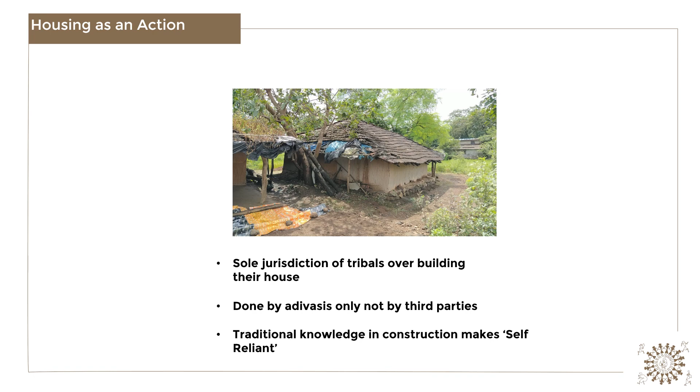Talking about their construction methodology and building materials, Warli makes vernacular houses like wattle and daub construction using karvi, which is a natural grass, bamboo, cow dung, mud, timber, along with Mangalore clay tiles, which are used as a roofing material, and other natural fibers.

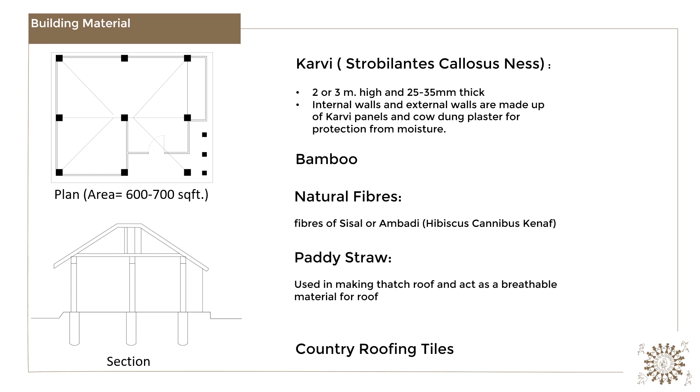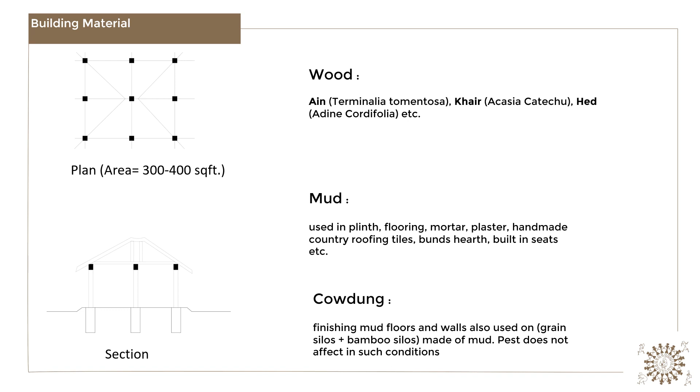They use locally available timber wood, such as ain and khair. They use mud and cow dung in building their houses and for making canvases to draw Warli art over. These are the various typologies of Warli housing construction.

After documentation of the tribal community and doing an ethnographic study, the project brief comes down to the following points: their cultural heritage and values should be preserved, and people should learn from and espouse the cultural values of the tribal people. Hence it is needed to display the traditional heritage, cultural values and ethos of the Warli community. Since they are a socially and economically less privileged society, it also needs to generate employment avenues for the tribals and boost tourism in the region.

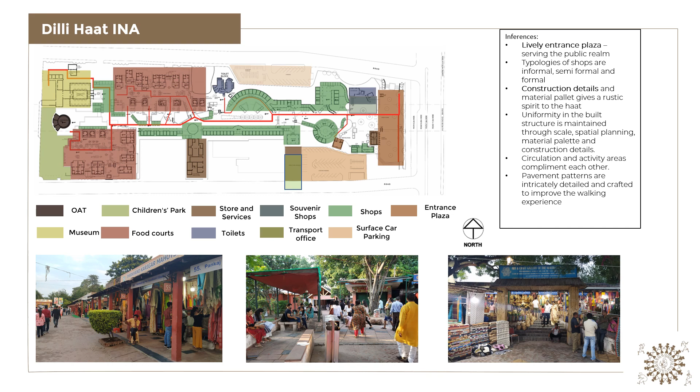I did case studies of Delhi Haat INA, Pitampura, Janakpuri, and the National Handicrafts Museum. Inferences from Delhi Haat INA are that it provides a lively entrance plaza which serves the public realm. There's uniformity in the built structure maintained through scale, spatial planning, material palette and construction details. Also, crafting of paving patterns is done to improve the walking experience of visitors.

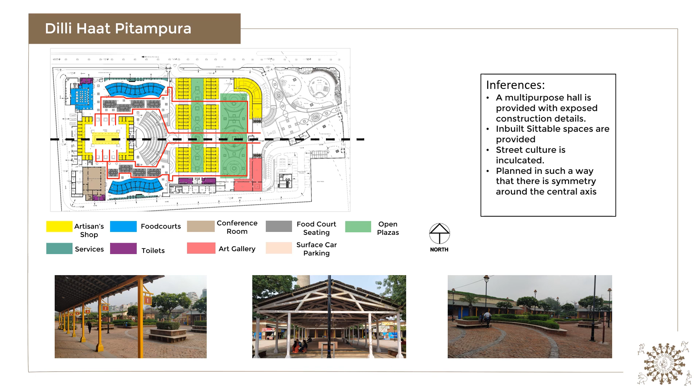Inferences from Delhi Haat Pitampura are providing an open multipurpose hall surrounded by shops, with inbuilt seating spaces in the plazas. Street culture is inculcated and planned so there is symmetry around the central axis of the haat. Inferences from the National Handicrafts Museum are that segregation of areas is done via a strong axis while yet creating visual and physical connection.

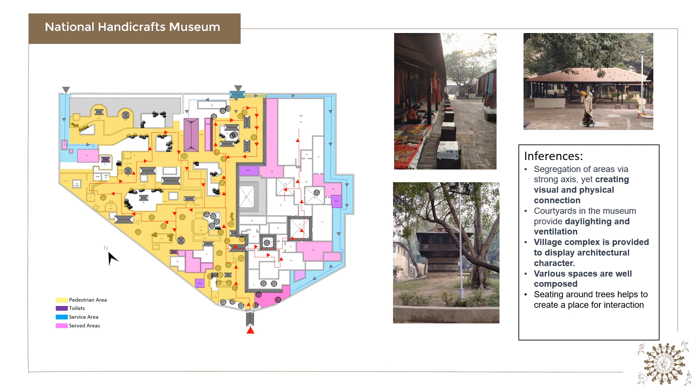In the National Handicrafts Museum, a village complex is provided to display vernacular architectural character. Inferences from Delhi Haat Janakpuri are that the built mass is kept fluidic in nature, and a very different architectural character is developed from the other two Delhi Haats through an eclectic mix of materials and juxtaposition. The third inference is that the cluster of cylindrical shop units looks good in plan but does not perform in reality, as it creates lots of negative spaces at the heart.

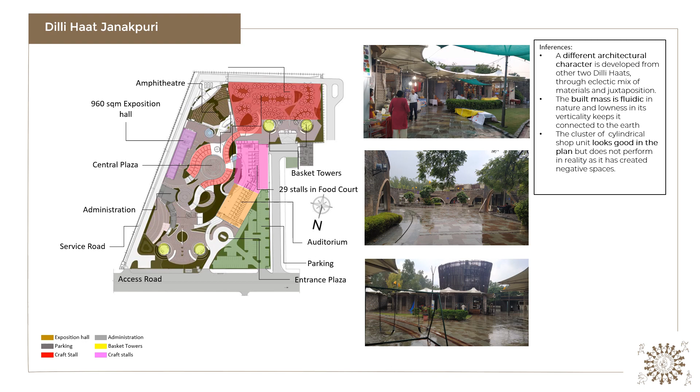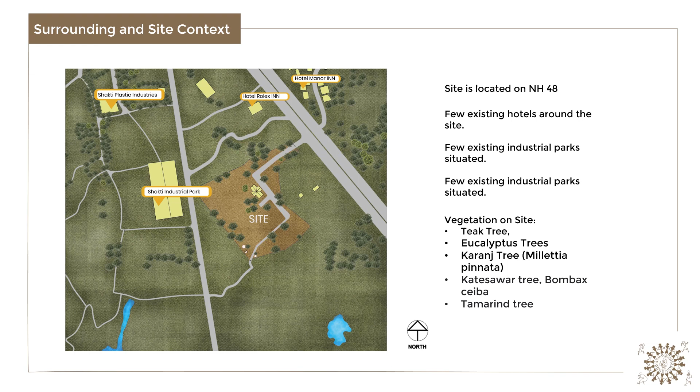Talking about the surrounding context, the site is located on NH48, and it is only through this highway that tourists will access the haat. Apart from vast farmlands around the site, some hotels and industries are also located, which are quite less consequential to the design of the haat. Natural vegetation and features on the site will be preserved, except the existing building, which needs to be demolished.

Talking about the topography of the site, it's an undulating site covered with shrubs, hedges, bushes and some rocky terrain. The site has a very gentle slope of around 3 to 4%. This feature of the site can be used in creating level differences, generating interesting urban design elements like steps and other kinds of inbuilt seating.

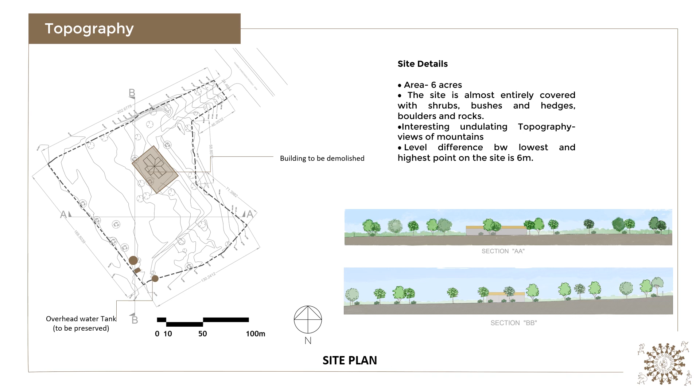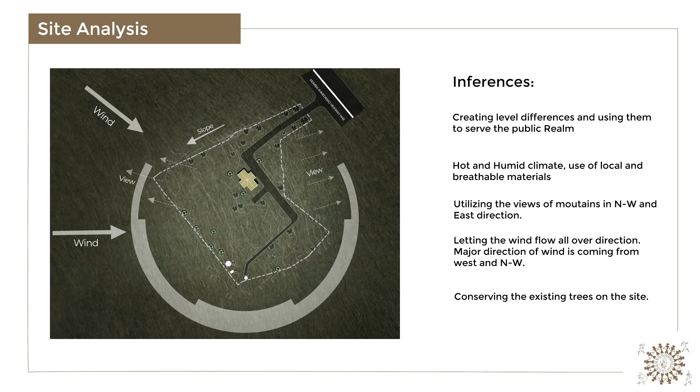Talking about the site analysis, the climate of Palghar is hot and humid, with maximum temperature reaching up to 40 degrees Celsius. So I need to employ local and breathable materials in the design, like using lime mortar in making brick walls and also using local timber. Also, the views of the mountains should be exploited while making the design, and the massing of the haat should be done so that winds coming from the west and northwest flow all over the site.

These two are the views to the mountain ranges from the site, and these views can be exploited while designing the haat to provide interesting open public spaces which can harness the beauty of these views. This slide shows views of the site depicting its natural topography, terrain, and vegetation.

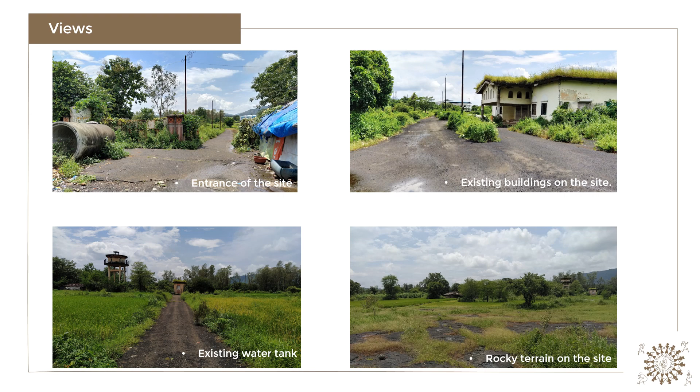For this project, I have taken inferences from the Development Control Regulation of MMRDA and the National Building Code. It comes under the land use classification of public and semi-public zone, with maximum ground coverage possible of 35%, maximum FAR of 1, setbacks from the boundary of 6 meters, and maximum building height possible in the site complex of 15 meters.

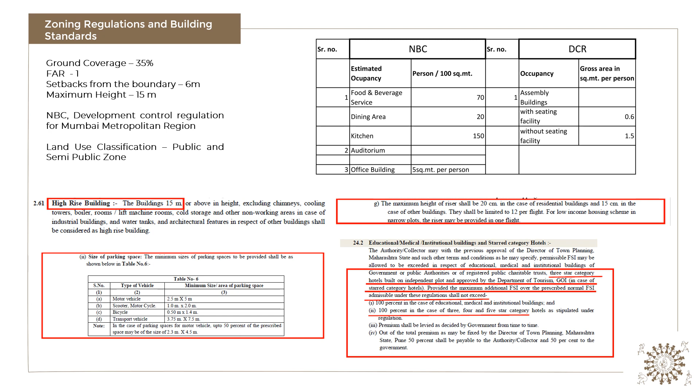After doing all types of studies and analysis, I think in a larger context the project should serve and incorporate the views, needs, and necessities of three stakeholders: government, tourists, and tribal people, in the priority order of first tribal people, second tourists, and third government.

For zoning purposes, I have divided the site into three major zones. First is the welcome zone, which will welcome the tourists. Second is the interaction zone, where tourists get a chance to interact with shopkeepers, vendors, and artists. Third is the dwell zone, where tourists get a chance to work with the artists, take part in workshops, and make something, so they are able to espouse the values and cultural heritage of the tribal people.

The welcome zone will facilitate the needs, necessities, and views of administration and government. Facilities like admin offices, entrance plaza, ticketing, staff residence, and residence for guests and VIPs will come in this zone, along with organization of cultural activities. In the interaction zone, it is designed to serve the public realm and promote interaction of tourists with tribals.

This zone would include spaces such as plazas, streets, art and craft shops, food courts, and multipurpose halls.

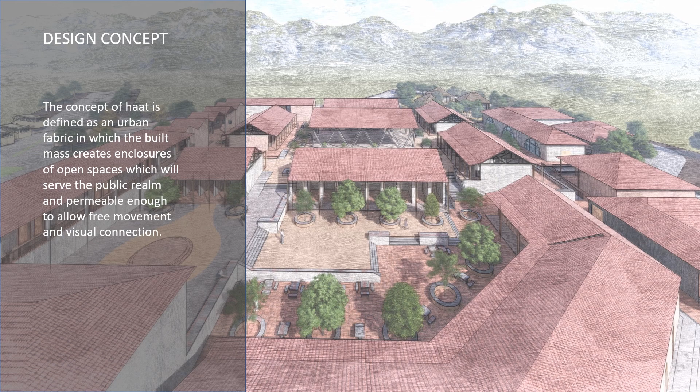Now let's talk about the design concept of the haat. The design concept of the haat is defined as an urban fabric in which the built mass creates enclosures of open spaces which will serve the public realm and be permeable enough to allow free movement and visual connection throughout the haat. In the design of the haat, I have majorly focused on the design of public spaces, and I have also done it as an advanced study topic.

Now, for public space design, I had to study placemaking. For this, I took reference from the Street Life project by William H. Whyte, who was a sociologist. He did the study over the public spaces of New York. He argued that placemaking is a sociological phenomena which supports all the economic and social activities in a public space. As an urban designer, one needs to design public spaces in such a way that it facilitates the social and economic activities of that area.

Also, I have taken references from my case studies, and the design elements which I have considered in my design are creating open public space through enclosure of built masses, creating level differences as per the contoured site to create various urban design elements like steps, articulation of plaza, inbuilt informal seating spaces, and landscape. Also, I will be giving a rustic effect to the haat by providing street corridors along shops and food courts, also using traditional built form in the haat, providing the views of natural scenery and mountains from OAT, stage, and guest house.

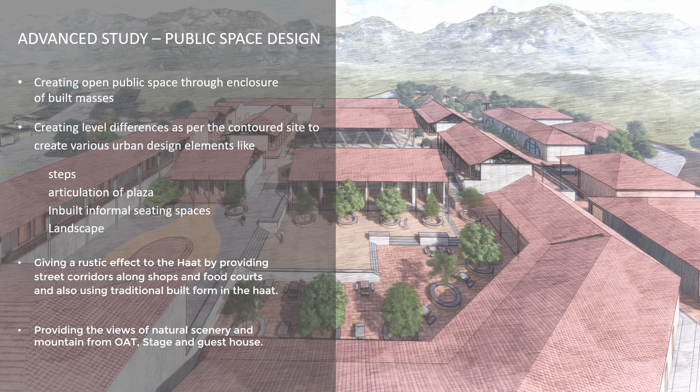Now, talking about the site planning, the people will be welcomed at the entrance plaza, and the tourists, after purchasing tickets, can enter into the haat, while the guests will be accompanied to the guest houses in the welcome zone. Also, the staff will be available to serve the guests.

The OAT and open stages are put up in the proximity to the guest house. The reason is that the guest can easily reach the OAT and stage court. Also, one gets spectacular views of mountains from the OAT in the northwest.

In the interaction zone, the street culture is inculcated, and shop clusters enclose open public spaces and a multi-purpose hall to serve the public realm. Since the site is undulating and has a slope, necessary level differences are created and connected through steps and ramps. All the plazas and courts are visually connected and permeable enough to allow free movement.

In the east of the site there is a food court which is connected to the central stage and exhibition courts. The food court is surrounded by food stalls and shop clusters.

Deep down south of the site is the Dwell Zone, which comprises the exhibition hall. One can reach the art workshop, carpentry workshop, and heritage museum through the exhibition hall only. So this is a way of adding an extra layer to the movement path of the people, which will enrich the experience of the visitors and let them delve more deeply into the culture of Warli Adivasis.

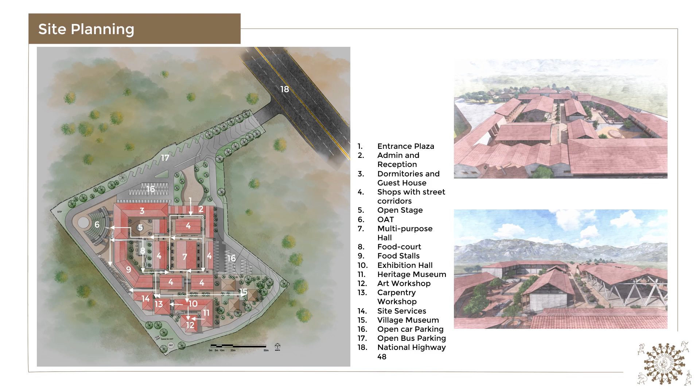In the southeast is the village museum, which depicts the traditional model of the Warli villages to the visitors. Also, the parking spaces are provided at the entrance of the site and also adjacent to the village museum.

In the area statement, I have divided all the built spaces into five major categories, which are basically admin and office, accommodation, commercial, exhibition and workshop, and parking. So admin and office space has an area of 427 square meters, and accommodation spaces are built in an area of 1224 square meters, and all the commercial built mass, which includes shops, food stalls, and other site services buildings, is built in an area of...

3374 square meters. The exhibition and workshop building takes an area of 2500 square meters. The parking spaces are divided into two parts: one for the normal tourists and the other for the staff people. So there are around a total of 80 car parking spaces available, 8 bus parking spaces, and 2 loading bay truck parking spaces. The total built up area is...

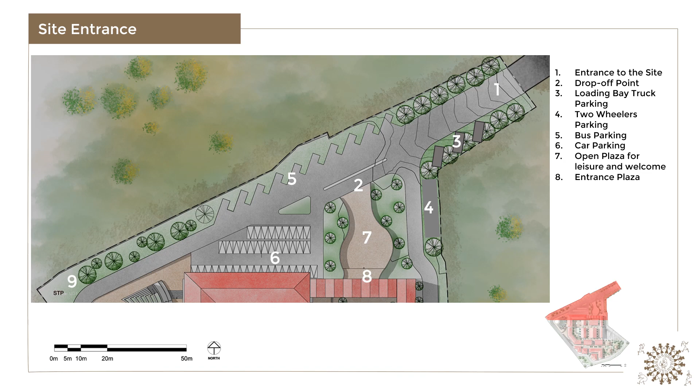6175 square meters. Entrance to the site is from a 12-meter wide road which is connected to the highway. The sideways of the 12-meter wide road provide spaces for the parking of two-wheelers, buses, cars, etc. At point 2 is the drop point, 7 is the sloping plaza which connects the drop-off point to the entrance plaza where tickets can be bought. At 9, space for STP is provided.

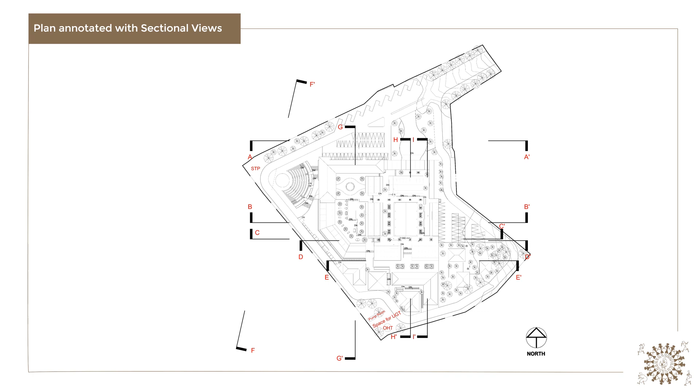This plan layout shows the site plan annotated with the sections. These sections I will be discussing in the upcoming slides along with the plans.

Section AA is the sectional elevation of the front facade of the Haat with sawtooth roofs of Mangalore tiles over the entrance plaza and admin block, situated just adjacent to the heavy and bulky mass of the guest house and dormitories block. Both blocks contrast with each other in terms of their massing.

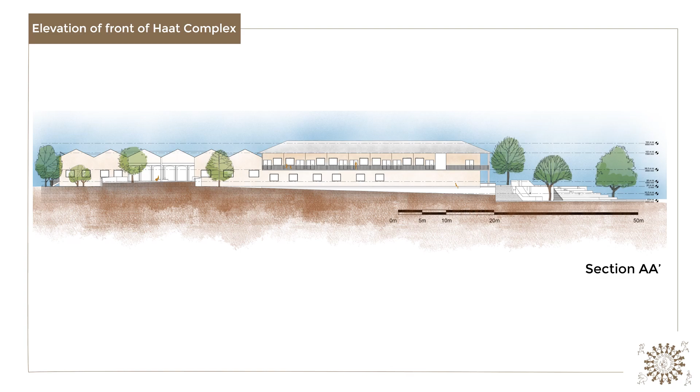This view shows the front of the Haat and entrance plaza. From the drop-off point, visitors walk through a sloping plaza which enhances the quality of walking and also provides leisure space and waiting area.

The plan of the central court, which encloses public spaces, is articulated into two levels: one at 95.55 meters and the other at 96 meters, joined through steps and ramps. The public spaces are dotted with inbuilt seating around the planters, improving the quality of public spaces.

At the center is the multipurpose hall, which is open enough that informal activities take place in it, with vendors coming and showing off their products, art and craft work. It is built up of slanting I-shaped columns, and the top roof is supported by the truss system.

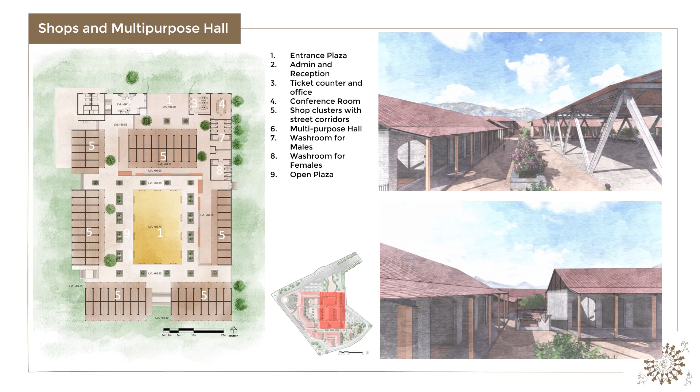The street corridors are permeable enough and well connected to the public spaces, so the circulation spaces between the multipurpose hall and street corridors complement the activity spaces. Also, the plaza becomes the great spectacle of public activities. Traditional built form of gable roofing is used with brick paving on the plaza, giving it a rustic effect.

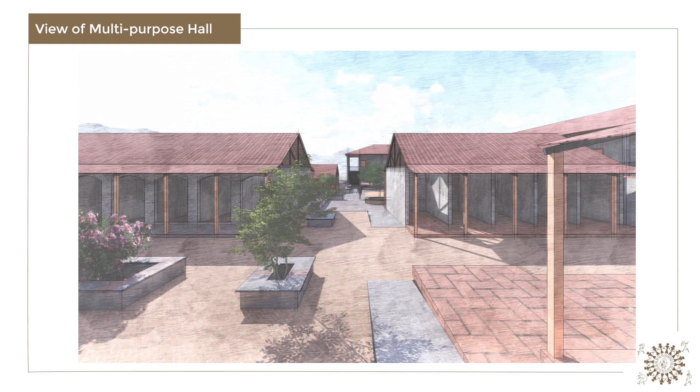These site sections depict the level differences created as per the site contours, and how the built mass and enclosed open space are built along the natural topography. The section also depicts the built form and the structural elements used in them, like king post trusses used for supporting the roofs of shops and food stalls.

Also the multipurpose hall, which has the highest volume by mass and is quite open, is supported by the slanted I-shaped columns and truss system.

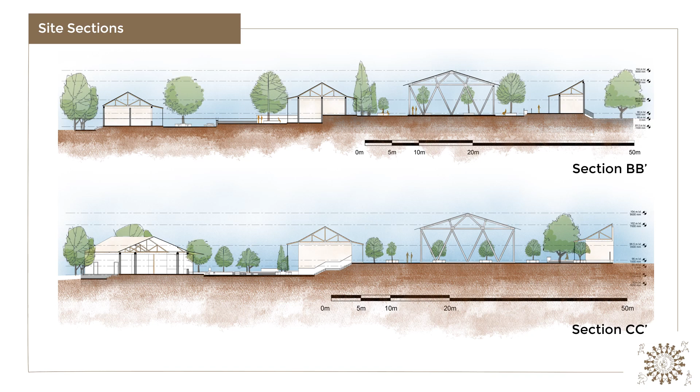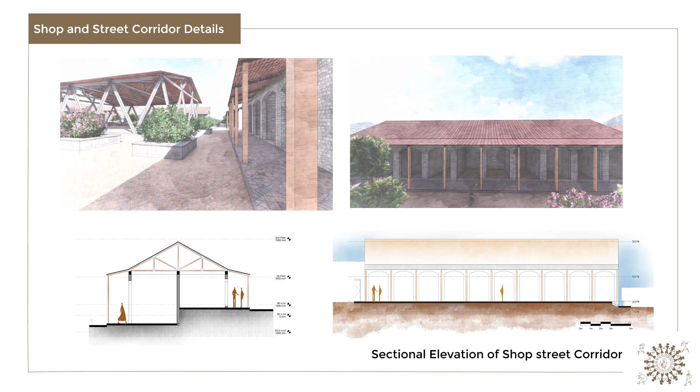Here the details of the street corridor are depicted. Proportions and scale of street corridors are kept to the human scale, and it's quite visible from the sectional details and views. The detail of king post trusses is also depicted, which supports the roof structure of the entire complex.

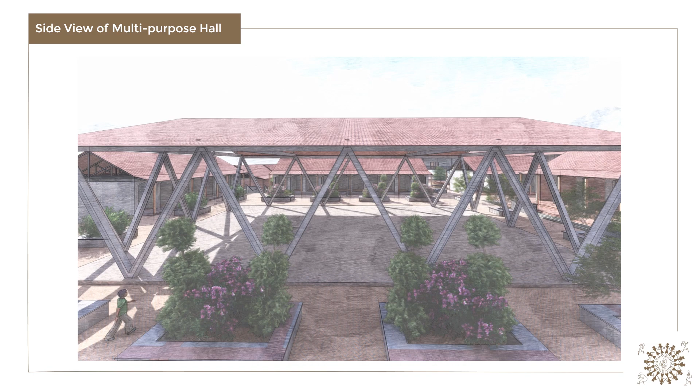This depicts the view showing the voluminous open space provided by the multipurpose hall, which is also in contrast with the built mass of the shops around it, and the view also depicts the structural detail of the hall. This view depicts the side view of the multipurpose hall, again showing its voluminous scale and the quantity of space within it and around it.

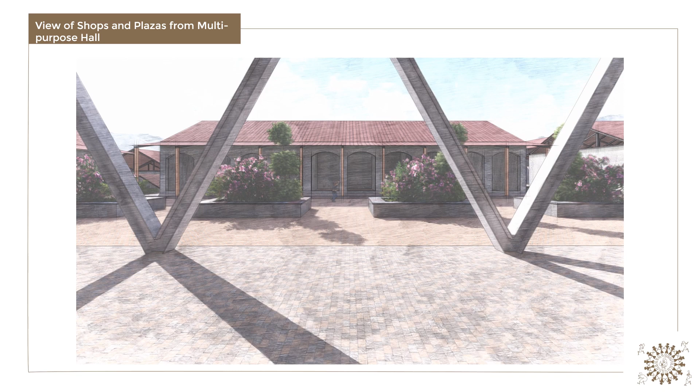This view provides a view of the shopping complex and public plazas around the multipurpose hall. The multipurpose hall creates a semi-enclosed space within it, providing a very enriched experience to the visitor.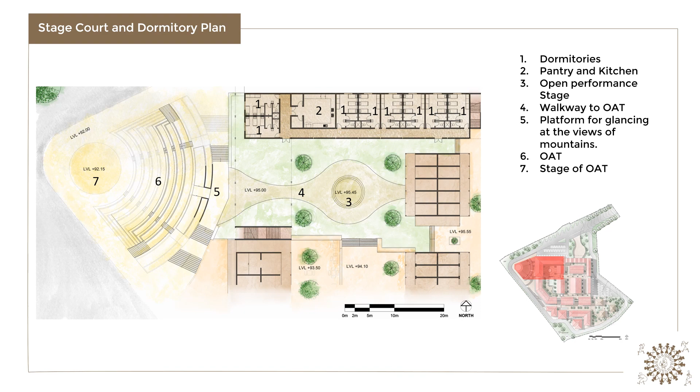This shows the L-shaped plan of the guest house block overlaid upon the dormitories block. Each guest house unit overlooks the view of mountains, which provides a very enriched experience to the visitor.

This sectional view depicts the western sectional elevation of the site, depicting the massing of the blocks and the elevation of the OAT. Also, gable and pitched roofs of the various blocks are visible from this view, placed at different levels.

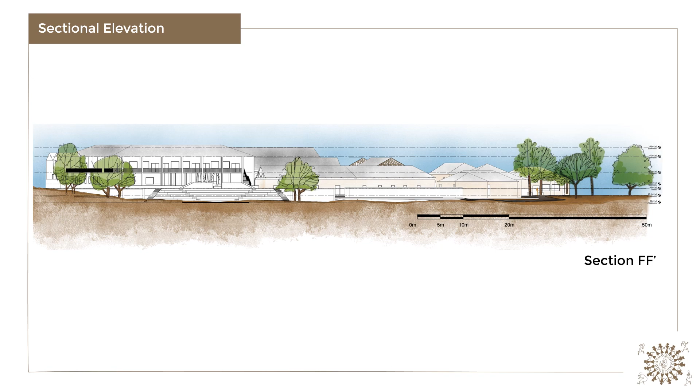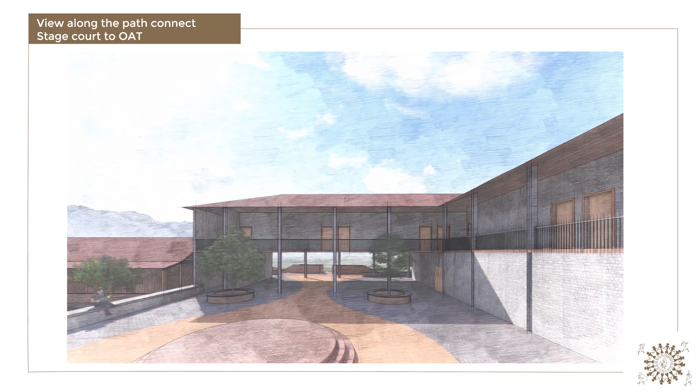This view depicts the dormitories and L-shaped guest house block, open performance stage, and pathway from the stage to the platform, depicting the clear view of the mountains.

This view is taken from the platform overlooking the serene views of the mountains, and one can go from here to the OAT and overlook the mountains.

This view shows the design of the OAT. Steps from both sides are provided so it eases movement for going up and coming down the OAT.

Also this OAT is well merged with the topography, fills up the level difference of 3 meters by providing opportunities to perform cultural activities on it.

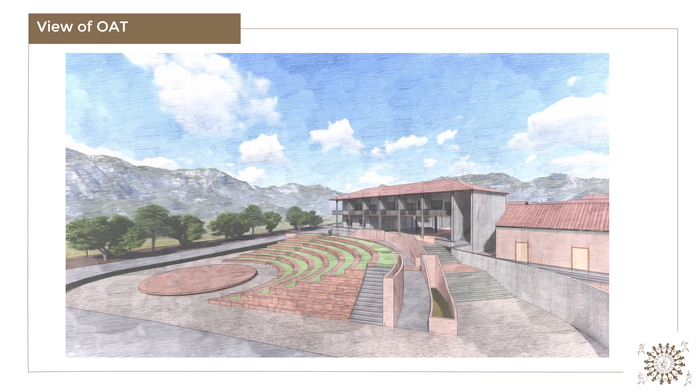The food court plan depicts the planning of food stalls and street shops enclosing a plaza which is articulated into levels, and steps are provided which act as seating spaces. Also round seating around plantings and trees are provided which gives shaded spaces for sitting. Also inbuilt seating spaces are provided on the side, and open spaces are left for the placement of movable chairs and tables.

The food court is fully permeable and visually accessible from the central and stage court. The view depicts the aura of the food court and its planning.

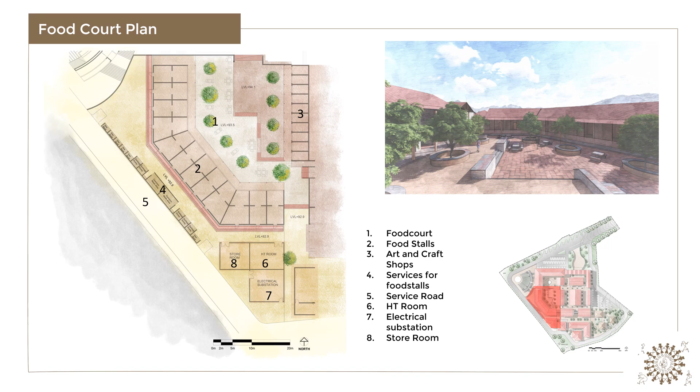The first section, DD, depicts the connectivity of central court with the food court. It is quite clear that food court is fully permeable and visually accessible from the central court. The section also depicts the level differences between the food court and central court and how both are connected through steps and ramps.

Similarly, the section GG depicts the visual and physical permeability between the food court and stage court. Also it depicts the level differences and massing of the blocks contrasting with each other.

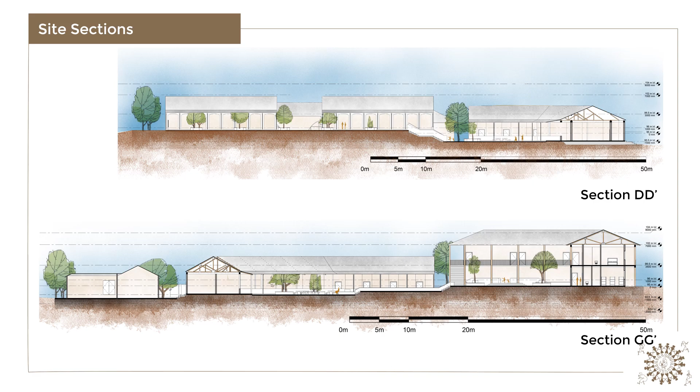This is a very pleasing view of the food court which creates a vista. A rising view of steps provides a feeling of continuity and connects the food court to the stage court.

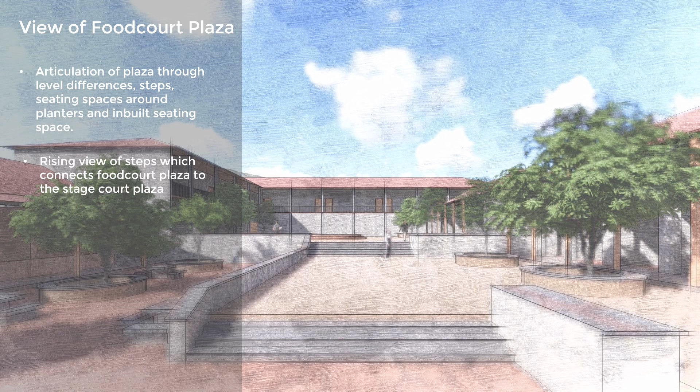The design elements which were used for the placemaking of this public space are articulation of plaza through level differences, providing steps, seating spaces around planters, and inbuilt seating space.

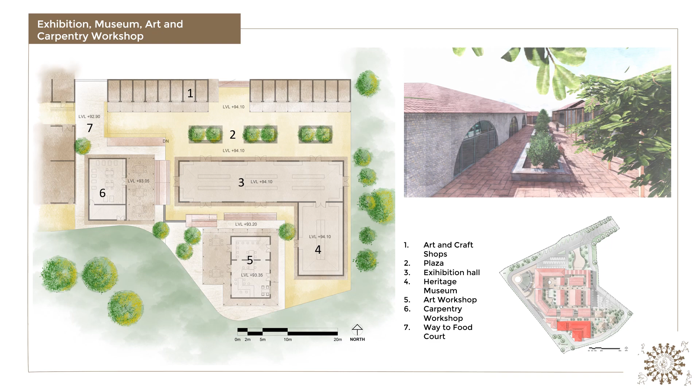These site sections show the relationship of food court to the exhibition plaza, and then the connection of the exhibition hall to the art workshop and carpentry workshop and heritage museum.

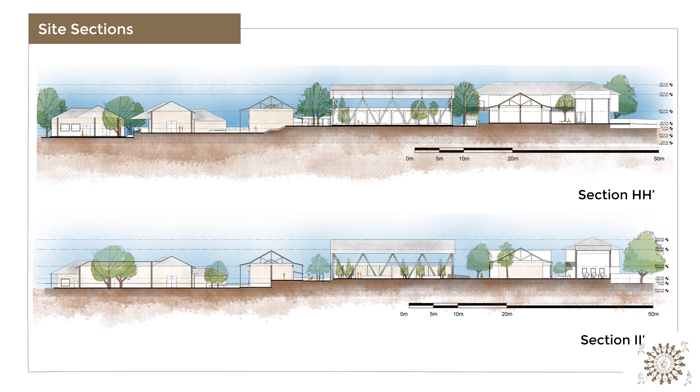This shows the planning of the art workshop, which is divided into two rooms connected from inside. Also a semi-open space is provided in the workshop so that people can paint and draw while being surrounded by nature.

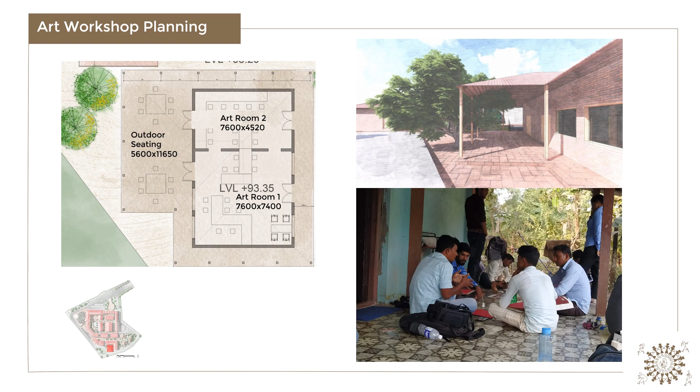Also, the plan layout depicts the placement of tables and stools for drawing and painting purposes.

This shows the planning of the carpentry workshop. The wood cutting machines are placed near the storeroom so that wood can be taken from the storeroom and cut easily. It is then taken to the jigsaw machine which creates designs on the wooden piece, and then to the hole drilling machine.

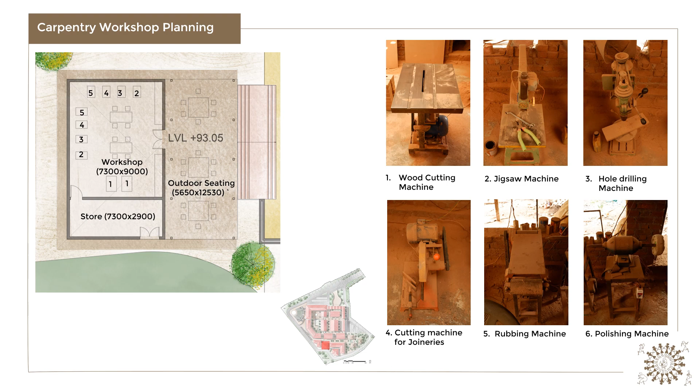After this it is taken to do cutting for wooden joineries. Then it is finally taken to the rubbing machine and then to the polishing machine to complete the woodwork. Also an open space is provided for people to work and design over the woodwork.

This shows the planning of the village museum which depicts the traditional model of a Warli community village. The Warli houses are provided, and the museum is planned in such a way that it will depict the traditional construction knowledge of the tribal, and visitors can learn from it.

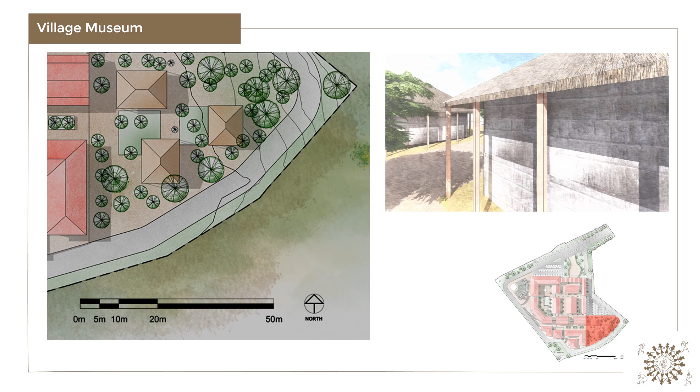This view shows the three tribal huts displaying the vernacular architecture of the Warli Adivasi community and providing a glimpse of Warli villages to an urban tourist.

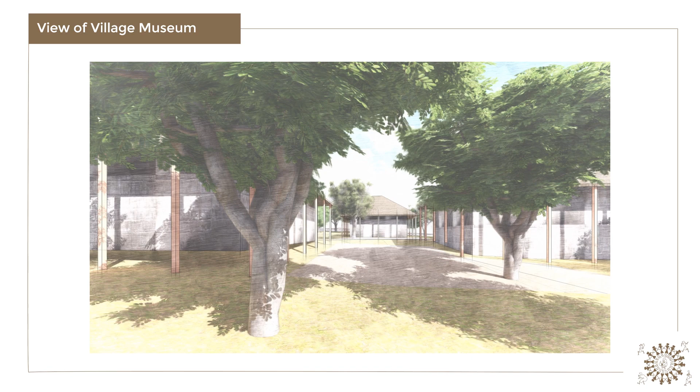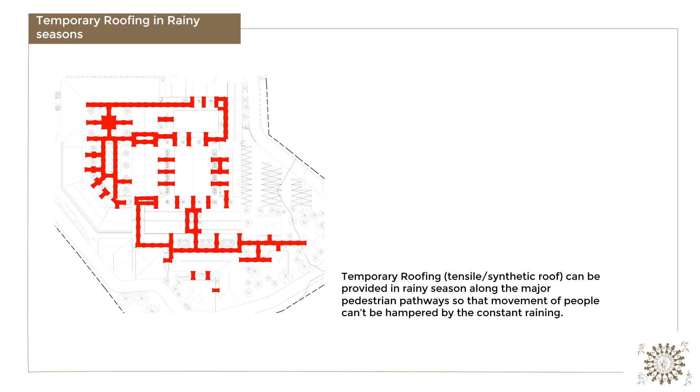Since heavy rainfall occurs in the rainy season, temporary roofing, either tensile or synthetic roof, can be provided in the rainy season along the major pedestrian pathways so that movement of people cannot be hampered by the constant raining in the plaza. Temporary stalls shall be provided in peak season or on festivals to accommodate many more travelers.

Temporary stalls shall be provided to sell their art and craft work. The size of temporary stalls would be 2.4 meters by 1.5 meters.

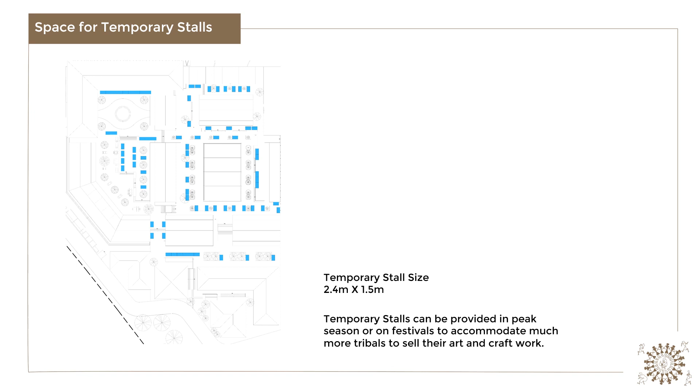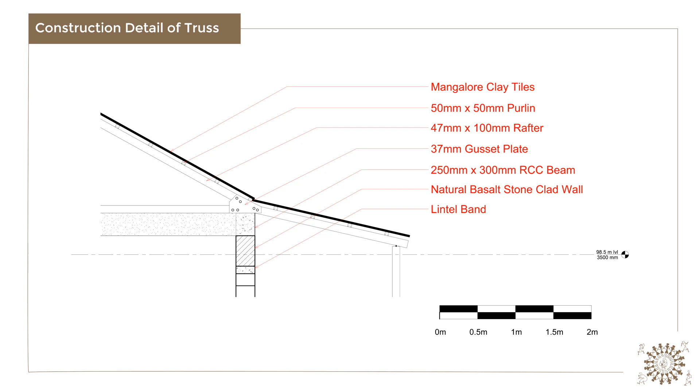As shown here, the joinery of queen post truss. The wooden and timber posts are joined through a gusset plate of 37 mm. The purlins support the roof tiles and the rafters support the purlins.

It shows the construction details of the footing. The wall rests upon a plinth to protect it from seismic waves. The footing is made up of stone masonry using cement mortar of 1:6.

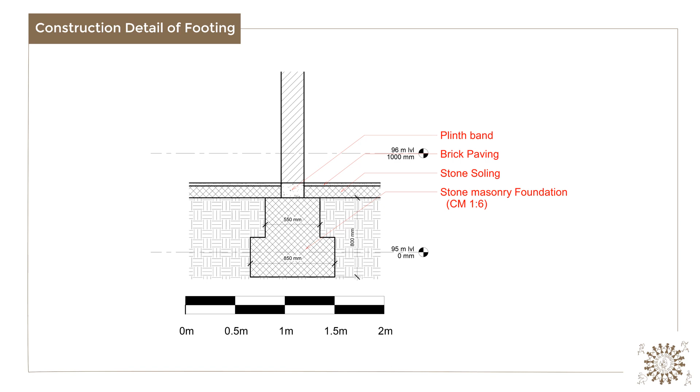The footing is 900 mm deep and 550 millimeter wide at the upper level, and 850 mm wide at lower levels.